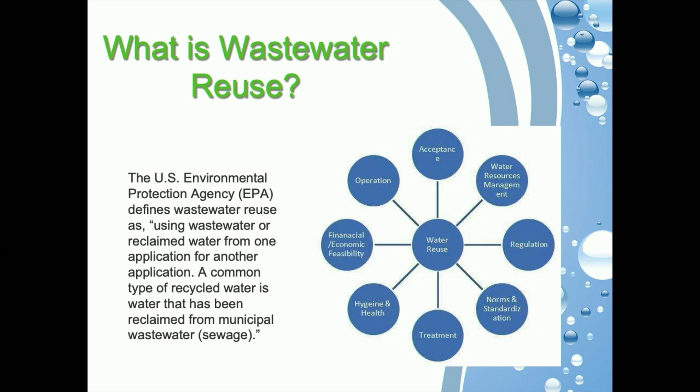I'm sure most of y'all have heard there are cities out there doing direct potable reuse. You look at Wichita Falls, you look at El Paso—those communities are already doing that. I think somewhere in the future Amarillo may be thinking about those things, but right now we have a method for our wastewater.

The most common reason is trying to find ways that we don't end up eating through all of our potable water that's floating around out there today. So we want to stave that off. And I think that's the final message for what we're going to talk about today. When I get to the end of this, I promise we're going to talk about what impact this actually has on the city of Amarillo and the Texas Panhandle.

There's different types of reuse. Obviously urban reuse—there are a lot of different places starting to get into using treated wastewater for lots of different things. You can use it on golf courses, in parks. The city of Amarillo does this now. We have a pipeline that goes from our Hollywood Road wastewater treatment plant to the golf course. We can fill their ponds, and we can also use it for irrigation out there if we needed to.

There's some agricultural reuse—we've already talked about the demand for agricultural use in the Texas Panhandle. So any non-food crops right now, we could actually use it for that. We'll talk about advantages and disadvantages here in a second. There's also recreational impoundments such as lakes and ponds, and we can help with increased flows in streams. We've seen that too—if you think about the streams that are going around, we're using most of the water that's going through those streams, and now the flows have started to drop off. This is another way we can get some of that back. And then industrial reuse, which is how the city of Amarillo is primarily using ours today.

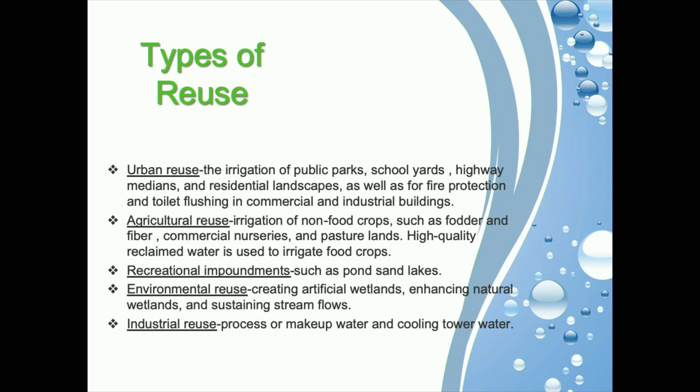So there is one critical step in this process: it needs to be treated to a level where it doesn't cause problems for the general public. Obviously there are some contaminants floating around in wastewater, and if we don't take care of that, those things get compounded as we start to send it out into the system. The state, TCEQ, EPA are very interested in making sure that if there is some type of reuse for wastewater, it's treated to a point where people won't get sick.

But there are lots of historical examples of people using treated wastewater, and part of it is it's been diluted by rainwater. This happened all the way back to 3000 BC—they were diluting it with rainwater and sand, filtering that, and reusing it for their crops and other things. Mexico's been using it for agricultural things. Anything that's going to be distilled—tequila, whiskey, those types of things—or if it's going to be cooked, you can use wastewater for those things.

On and on, right? But most recently in Japan, one of the big pushes is that they're running a separate set of lines around their towns. They're actually putting in reclaimed water lines, and that's just for flushing your toilet, or for irrigation of your plants, or watering your lawn and things like that. It's become a pretty good model, and it's starting to take off a little bit in Europe too—there's a couple of cities that are starting to use that.

So there are some constituents that need to be taken out of wastewater to make it safe for people. If you're in the water and sewer industry, you know about TSS, BOD, and COD. But the big thing is there are still a few things floating around out there, like metals that are really hard to treat, and VOCs that are also difficult to get out of our wastewater streams.

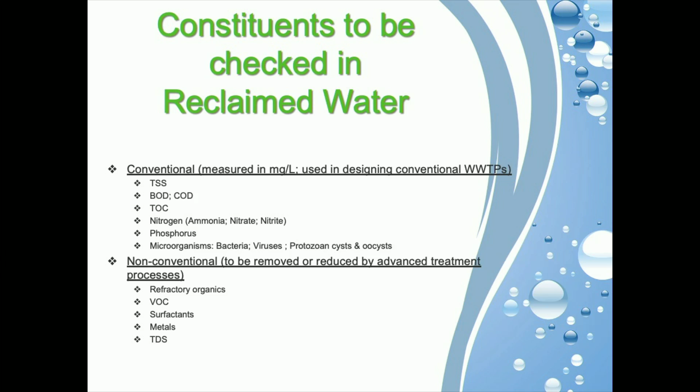So there are some problems with it too, and I'm going to talk about this specifically with our contract and partnership with Xcel. There is the potential for groundwater contamination with nitrates and nitrites.

Antibiotics aren't as effective if you're using this as a watering source for your plants. That's why they were talking this morning about hemp. It's really neat how hardy it is and how little water it takes, which makes it a good match for reuse or reclamation.

Sometimes wastewater can have a little bit of an odor. Typically after it's treated, that's not there. At most you might get a little bit of a musty smell, but that's all. But on the industrial side, since there's still nutrient floating around in some of that wastewater, it causes some serious problems.

For Xcel, they have cooling towers, and that's where we sell a lot of our retreated wastewater. One of the issues they have out there is scaling on the inside of their cooling tower. As it steams off, the scale sticks to the walls, and that's what was left over from the treatment process that didn't get taken out.

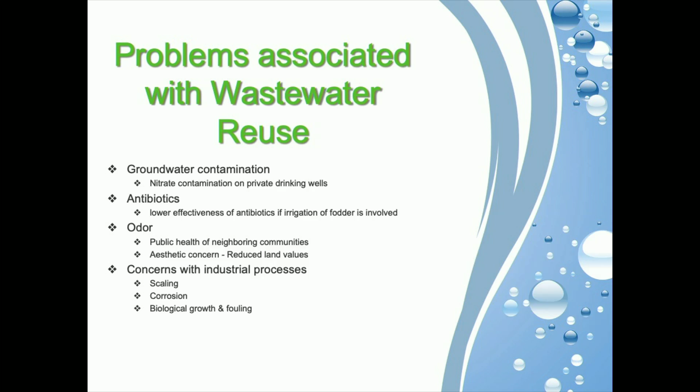So major advantages are, for one, it limits our use of potable water. I'm going to get to this at some point - how much water are we actually using and how much water are we selling, versus how much we could be saving ourselves by making sure this is a process we continue to do. Our capital cost is typically pretty low - the treatment process is already in place.

All we're doing is taking the water that comes out of that and selling it to somebody else so they can reuse it in a different method. Operation and maintenance is pretty simple - we don't normally have to add a whole lot of work to our process to make it work. And the provision of nutrient-rich wastewaters is actually good for certain areas.

In most cases, the quality of the wastewater and irrigation supply is better than that of some well water. Anybody around here ever drilled a well and come back with brackish water, gyp water, things like that? Plants don't normally like that type of water, so there is the possibility we can supply a better quality water than what we can get from different areas in the aquifer.

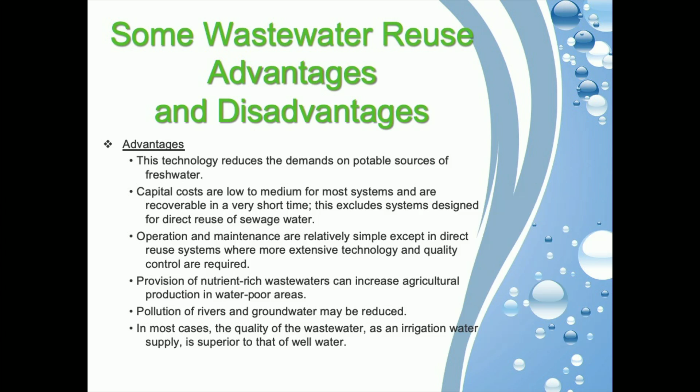So disadvantages - if implemented on a large scale, the revenues that come off of that are really going to be used back for this, but it may also fall into a category where it cuts our own throats, if you will. If we sell a lot of reclaimed water, then we're not going to be selling as much potable water. So as a municipality, there's a conflict of interest on both sides of this thing.

We want to conserve, but at the same time, over-conservation means we don't have revenue. So we have to make sure we're using it in a method that's beneficial on both sides. Reuse of wastewater is really seasonal - I'll show that in a slide where in the summertime, when peak demand is up for Xcel, we sell them a lot more water than in the wintertime when demand's not as high. But in some cases, reuse of wastewater is not even economically feasible.

When we're talking about farming, or using it for hemp irrigation, maybe even cotton irrigation, it may not be worth it for me to run a pipeline to your property just so you can get this water. So we need to think about things like that.

Application of untreated wastewater as irrigation water, or injected into our groundwater areas, can cause serious contamination. So we have to be really careful about how we do that.

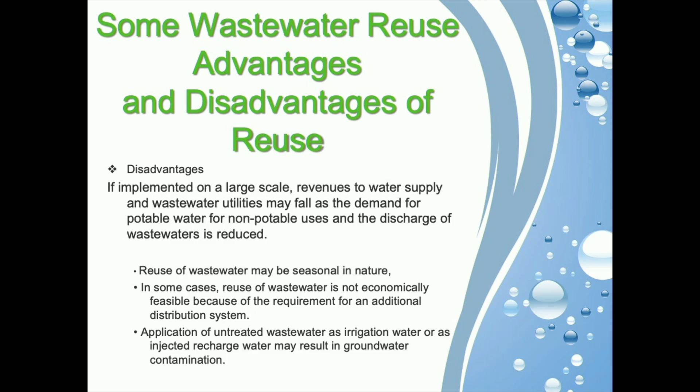So how does the city of Amarillo actually fit into this? This is kind of the meat and potatoes of it. The city of Amarillo has two wastewater treatment plants: the Hollywood Road plant, south of town, and the River Road plant, north of town.

Hollywood Road was built in 1963. Its original discharge for the wastewater effluent was irrigation of a nearby playa lake, and it was only rated for about 4.5 million gallons a day.

Since 1963, the city of Amarillo has grown, which means so has our wastewater. The plant was expanded in 1977, giving it an 8 million gallon rating, and then in 1988 Hollywood Road started discharging to Lake Tanglewood.

We stopped putting it into the playa lake and stopped using it for irrigation, and it went directly through Lake Tanglewood, which, believe it or not, is a good thing. It kept the lake full, kept things going, but it also had some unique challenges.

Part of it was how do we get it there? But in 1992 the plant was upgraded again, giving us a rating of 12 million gallons a day.

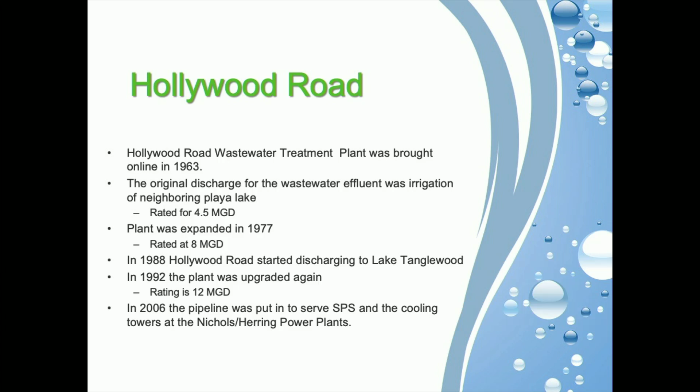In 2006, in a partnership with Xcel, a pipeline was put in that ran from Hollywood Road all the way out to the Nichols power plant, so they could get our effluent for cooling towers.

Things have changed just a little bit. River Road was the first wastewater treatment plant in Amarillo. Before 1927, they were just lagoons. The wastewater would sit in the lagoon, and whenever it left, it went into a creek — I think the North Amarillo Creek.

The plant was actually built in 1927. When it was built, it was a really simple process. They modernized it and put a rating of about 4.5 million gallons a day, and that happened in 1955.

In 1960, SPS decided they wanted to build the Nichols power plant, and that was the beginning of our partnership with Xcel. We were selling most of that water to Texaco for the refinery here in Amarillo, and when Xcel decided to do that, it was kind of the decline of the refinery in Amarillo.

So we started laying pipelines. In 1968, the plant was expanded to 12 million gallons, and in 1977 a pump station was put in along with a 27-inch line that went directly to SPS for the Nichols cooling station.

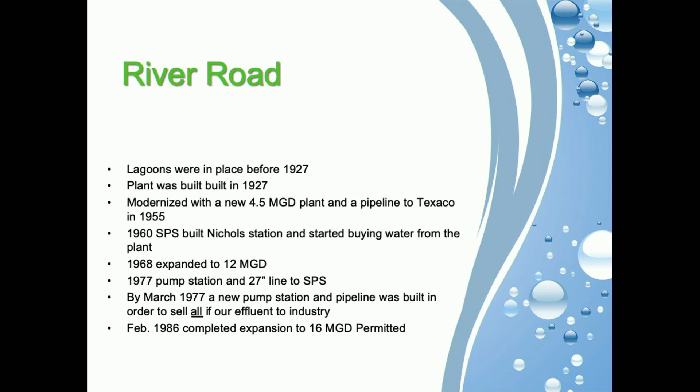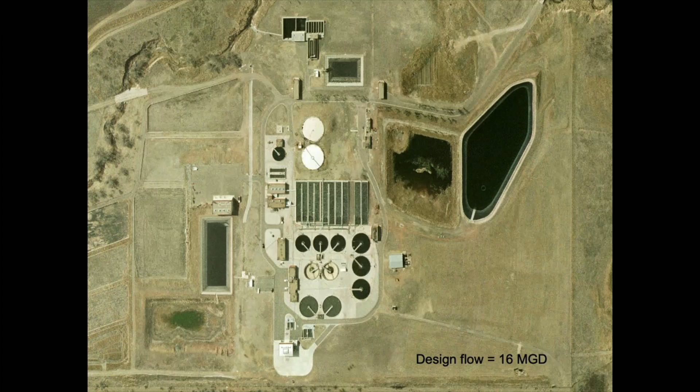In February 1986, they completed one last expansion that got it to about 16 million gallons a day. This is what the plant looks like currently. The water goes north through this picture, leaves through that last little portion, and goes out to the creek you can see on the left-hand side — that used to be our permitted discharge. It's still permitted, but most of the water we have out there now goes to the Nichols power plant.

The city of Amarillo had a reuse contract since 1955, which means we were kind of on the cutting edge of water reclamation and water reuse. In 1960, the city started selling its reclaimed water to SPS, and when the Nichols plant was built, SPS needed that effluent for supplementing their cooling waters. Before that, SPS would mix our reclaimed water with well water for cooling their towers, getting a couple of cycles out of it before using it for irrigation. That becomes important here in just a second.

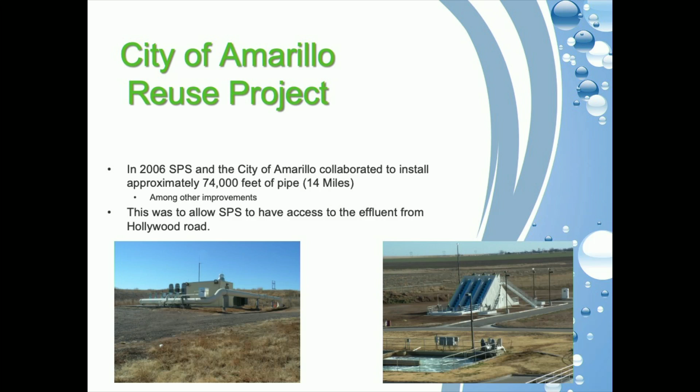We also had some new requirements that we had to meet. The water quality needed to change just a little bit, so they put in a re-aeration process at the end of our treatment plant, which actually helped us in the long run.

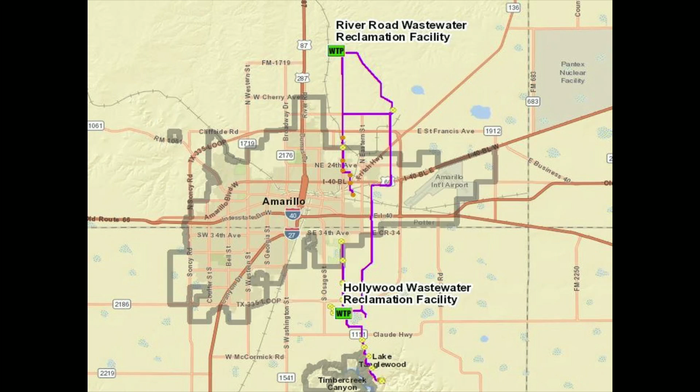In 2006, SPS traded some of the groundwater rights to the city of Amarillo in exchange for almost all of our effluent. We still had some obligations, like I said, to TCEQ and also the Curry Ranch.

But in recent years, nitrates have become an issue for SPS. With their land application process, TCEQ comes out, wants to know what the land application looks like, takes some soil samples, and realized that nitrate levels were pretty high. For us, we were just looking at it earlier today, our original nitrate levels on average were right around 21 parts per million, which is pretty high.

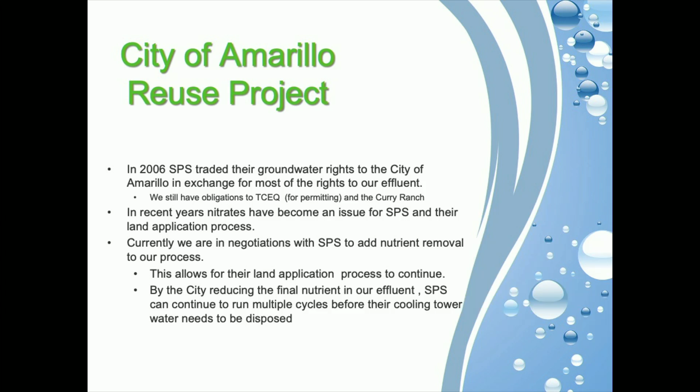In the proposed new direction we're going with them, we will try to get that down to 5 parts per million. That's a pretty big undertaking to do. Both of the plants will be upgraded. We're going to start running what's called an anoxic zone at the beginning of our aeration basins. What that does is it creates an ammonia spike, and then we aerate, and along with that ammonia drop, the nitrates go away with that too. So it gives us a better quality effluent coming out of the plant that goes to Xcel or SPS, which helps with some of their discharge processes too.

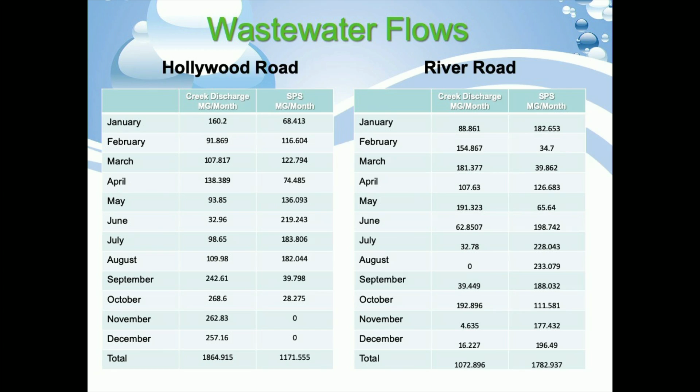So if we put that into perspective, in 2019 we sold over 2.9 billion gallons of reclaimed water to SPS. That is a huge amount of water. If SPS uses that water just 4 times, which typically it's only 2 but they can go up to 4, then that equates to 11.6 billion gallons of water.

That's an average of 35,599 acre-feet of water that doesn't have to come from the aquifer or from Lake Meredith. That's a pretty substantial savings in water.

If we take their total usage, let's say they used it four times every time the water went through, that would equate to one-seventh of the total volume of Lake Meredith, according to yesterday's numbers. And if we just take the water that we sold them, it's one-twenty-eighth of the total volume of Lake Meredith that's being saved every single year.

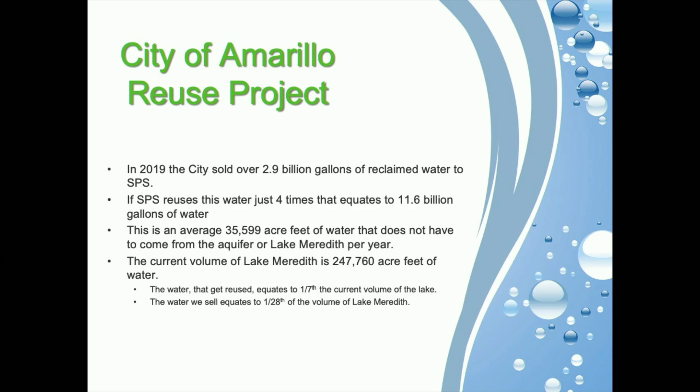That's a pretty impressive amount of savings across the Panhandle. Again, the city of Amarillo really is interested in conservation, and we want to save that as much as we possibly can.

Now there are some things coming down the road. The future is probably going to be direct potable reuse, which is typically where the wastewater ends up being run through a membrane. It's treated to a really high level, and then we can put that back at the beginning of our water treatment plant and start reusing that for our potable water process. Whether or not we can get enough buy-in from people to believe that's a good process, we'll see. There are some really interesting debates going on around the state right now about what that looks like.

Also, there is the potential for aquifer storage. We talked a little earlier about how water doesn't move horizontally very quickly in the aquifer. So if we put that water in there and it's treated to a really high level, we may be able to come back in 50 years and reuse that water. That's a really cool process to look at as a way to supplement how the aquifer is working today.

The other thing I wanted to mention is that Sarah Schlesinger had talked about educating our population. She said our population is going to increase 70% over the next 50 years. And if we don't have a plan to use or conserve this water today, what will it look like in the future?

There was a pretty good debate while the aquifer history and aquifer modeling presentations were going on about how do we know what that actually looks like somewhere in the future. We can estimate, we can guesstimate, we can pontificate, but at the end of the day, we don't know what that's going to look like. And so we have to educate people.